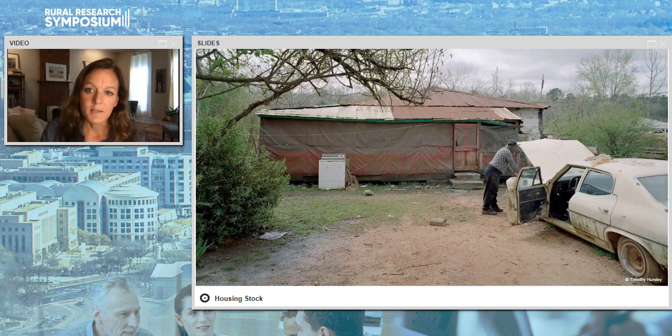But I'd like to focus back to housing and talk about where we are now. This was a common scene 20 years ago when we first started at the Rural Studio. But the housing stock has changed, and the trailer house is really what we see more of today. The reason for that is this new reality: it's easily attainable, kind of like getting a car note. Most of you probably know it has really only a 15-year lifespan, though. They're really hard to repair, and they're not really affordable at the end. But a lot of our clients own their own property already, so it's easy to buy a house and place it there. So we do understand, but we are seeking a better solution.

Around 14 years ago, we started the 20K house project, and we've developed a series of prototypes to address housing affordability. Over the years, we've built over 26 of them. Here's my chance to remind you again that this is all student work. Between about 4 students build each one of these projects.

The students in their 5th year of study work on big topics like aging in place or issues of accessibility. But we always address some very central criteria in our houses, which all buildings should have: they should be durable and buildable, waterproof, and secure.

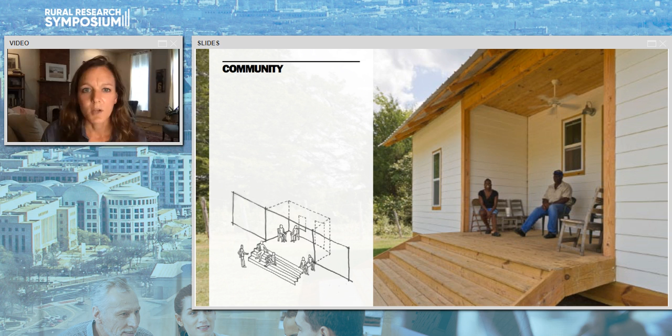Over the 14 years, we've developed a series of other criteria that are important to us, essentially high performance criteria in one way. Presence is important to us, so being proud and having a house that is dignified, a house that fosters a sense of community, which is often accomplished with a porch.

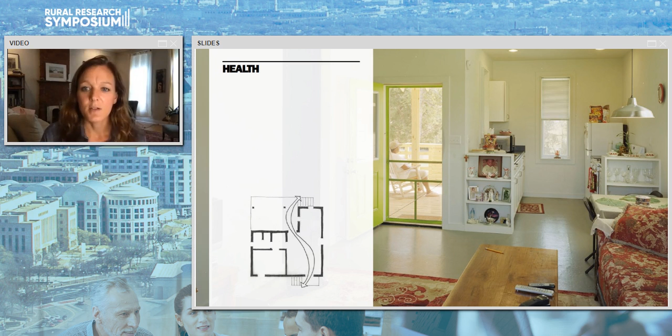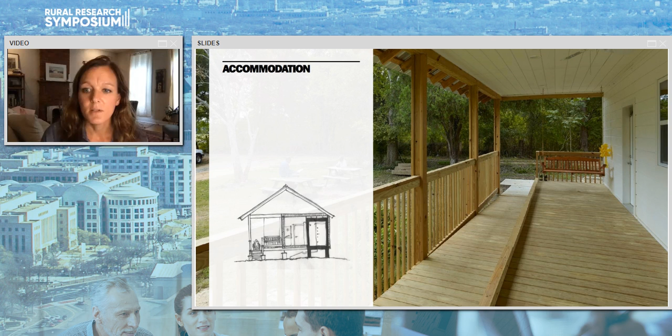Of course, the health of our occupants is really important, so our houses look at access to daylight, fresh air, and healthy materials. And of course, accommodation, making sure that we have housing types everyone can use, even if you have mobility impairments. The houses should also convey a sense of craft, because even something affordable should be well put together.

But I think the most important part of our program, and I keep reiterating it, is that architecture students build this. We are a hands-on program, so they are gaining knowledge about how to put buildings together, and our community is benefiting from their energy and their dedication.

I mentioned that the older students look at broad issues, and I want to take a minute to walk you through what the younger students study, which are my group, the 3rd-year architecture students. We take one of three prototypes each year and study it very intently. If the 5th-year students are studying broad issues, we're studying really deep and detailed issues.

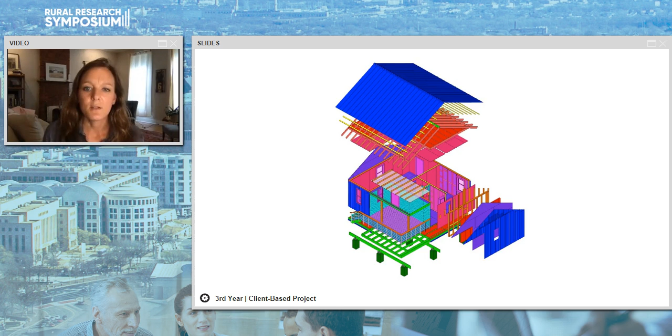My students look a lot like this. They're about 20 to 21 years old, don't have very much construction experience, and have actually never had any experience working with a real client and finding a suitable house for that individual.

This year's client is a lady named Ophelia Reed. She was born in our hometown of Newbern and has lived there for over 50 years. She has a very strong family network, and she also has an existing house and owns a piece of property. So when we were selecting which house was most appropriate for Ophelia, we took all of those things into consideration.

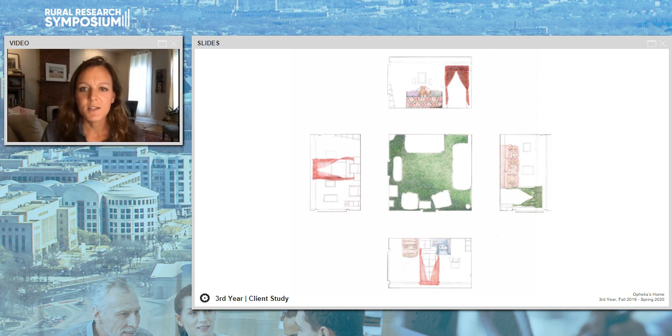One of the unique things about Ophelia, and the way we learn from her, is that I have my students do really detailed and beautiful drawings of her way of life. It's kind of like an interview, but through observation. One observation my students made was that she really loves her daybed, where she likes to sleep in the living room, where the TV is and where all the family activity is.

So special things like that for our client, we really take into account. This is a furniture layout. A lot of the houses we build are about 500 square feet, but Ophelia is moving from a house that's almost 1,200 square feet, so we catalog all of her belongings and ask her what she'll be taking over to the new house.

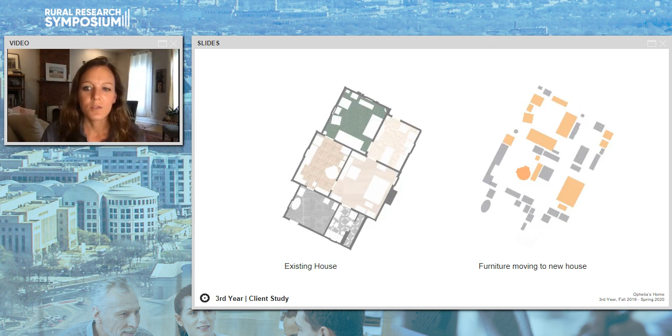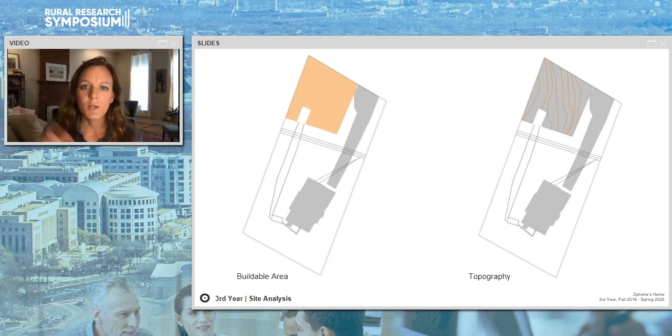...how flexible are the prototypes to fit onto an existing piece of property, which is really one of the missions of the 20K house. You can see here that Ophelia owns about a third of an acre, and we can only build on a third of that third of an acre.

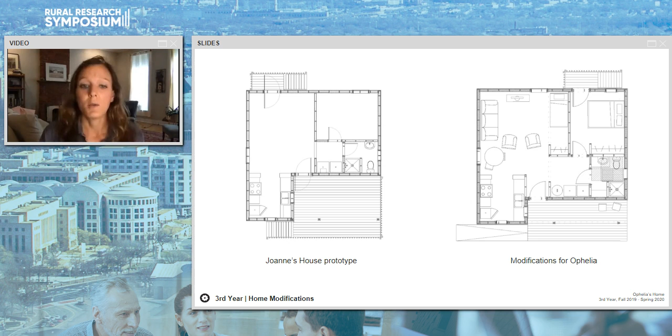So Ophelia's house is essentially a cousin of the prototype. You can see on the right the modified house plan. We enlarged the floor plan just a little bit and built a little sleeping nook into the living room, so Ophelia can put her daybed into the house, but another client might put a home office there, or it might be used for additional storage. These little tweaks are the way we adjust our houses to the real people who will occupy them, which is really the most important part.

So you can see Ophelia's house is actually the third iteration of the original one, which was what we call Joanne's.

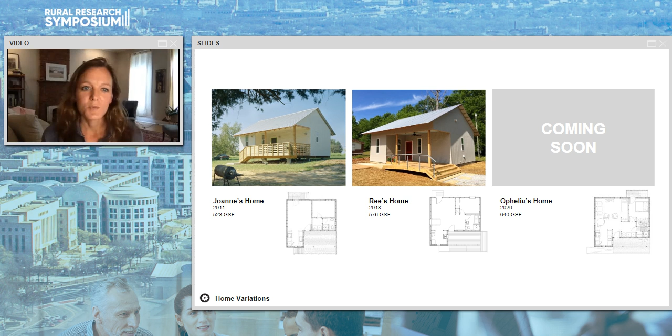I'm very proud, as my colleagues are, who work for the Rural Studio and the Front Porch Initiative, because we really think we are helping to train the next generation of architects and designers to be thoughtful contributors to the built environment.

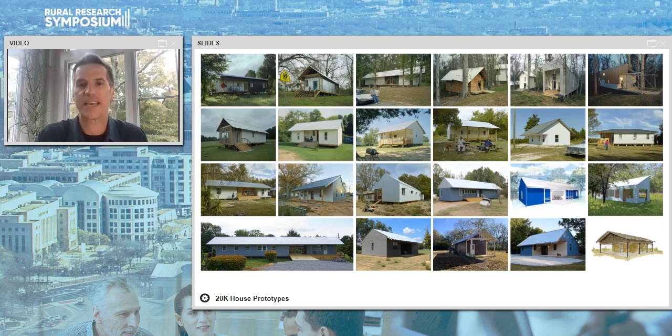As Emily discussed, over the past three decades Rural Studio has been engaged in the design and construction of numerous affordable housing prototypes in our five-county service area in the rural Black Belt of West Alabama. The Front Porch Initiative seeks to extend the impact of this applied research, offering housing products and technical assistance to external housing providers currently working to deliver homes in their own under-resourced rural communities.

In our own service area, Rural Studio works in a charity model, designing, building, and ultimately gifting houses to homeowners that under no circumstances could provide a home for themselves. The Front Porch Initiative simply takes the knowledge we have developed through these decades of work and shares it with housing providers outside our traditional service area so they can in turn provide the same energy efficient, resilient, and healthy homes to their clients of need through their own procurement models.

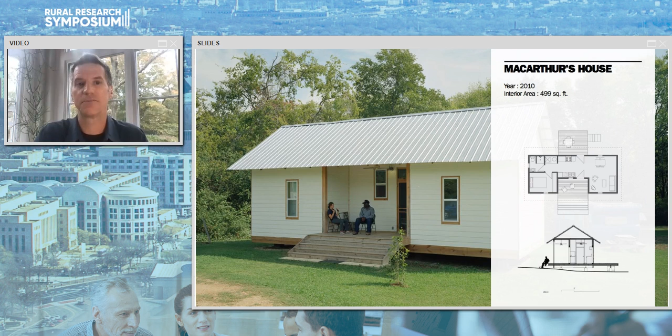We currently have four product lines of houses, each named after the first clients to own each of the prototypical homes. Each of the one and two bedroom houses are small, but not tiny. They are designed to be as efficient as they can be, meet all conventional code and lending requirements, be titled as real property, and be lived in normally. Here we have Dave's house, MacArthur's house, Joanne's house, and Buster's house.

In the Front Porch Initiative Technical Assistance Program, we share our knowledge on what to build relative to codes, universal design standards, lending and insurance requirements, and the like. We also share our know-how, where we show what to build through a comprehensive set of construction documents and specifications for each of the houses.

Through these partnerships we have learned a number of things. First, it's not only important to show what to build, we now know we have to show how to build it, and even more importantly, why it's built that way.

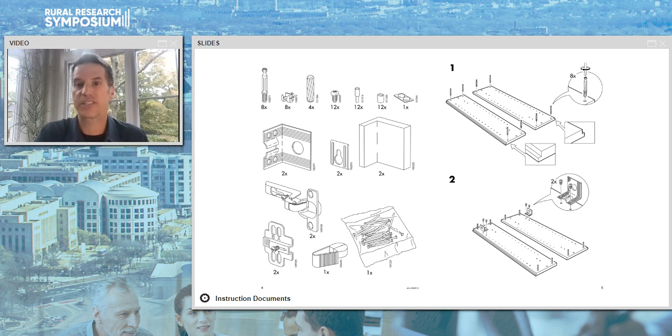We are all familiar with the IKEA model, where we're provided a catalog of materials, a funny little tool, and a really clear and comprehensive set of step-by-step instructions through which we can all become competent furniture builders. With our builder partners, we provide the same kind of instructional documents for the house.

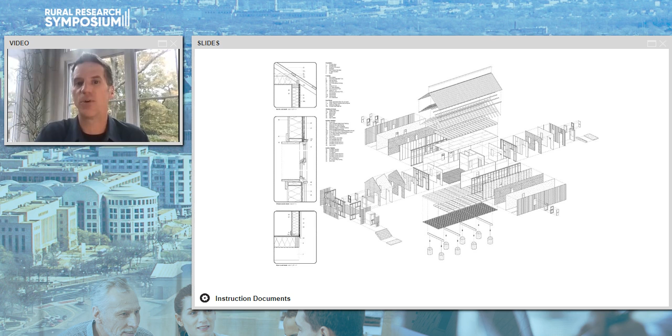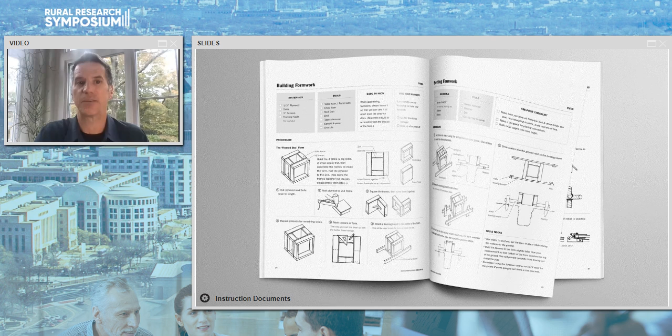We know every single detail about how the house is assembled, and every single thing about the construction sequence. From this we are able to provide a set of instruction documents that walk them step by step through both the hows and the whys of the construction of each home.

This notion of why we build this way versus that way is key in addressing the fundamental challenges of affordability. While it's certainly important to ask what does a house cost to build, it is perhaps more useful to consider what a house actually affords. In other words, what impact might we have on affordability if we could begin to consider the total cost of homeownership in the overall financial equation?

More directly, we have found that our homeowners are not primarily challenged because they can't afford their mortgage, which in rural places is often simply a direct reflection of the upfront costs of construction. Instead, they are more often challenged to stay in their homes because of four other circumstances.

First, they may have an unexpected energy bill. In our part of the world, our homeowners may have an energy bill of $35 to $45 a month in March and April, and an energy bill of $350 to $400 in July and August.

The second thing that happens, they may have an unexpected maintenance or repair bill. We live in an area of highly volatile climatic activity, right in the middle of Tornado Alley and right in the catcher's mitt of the Gulf Coast, where every Gulf hurricane pauses directly overhead as it becomes a tropical storm.

Maintenance and repair due to storm-related events plays a significant role in the financial security of our homeowners. Third, our homeowners might have an unexpected healthcare event in their lives. And the fourth area of influence on our homeowners' financial well-being is that our homeowners rely predominantly on part-time work, shift work, and seasonal work to make ends meet, and additionally live in complex kinship networks in which everything is shared, from housing, transportation and income, to food, elder care, and child care. Any disruption in these community networks can be disastrous for generations of a family.

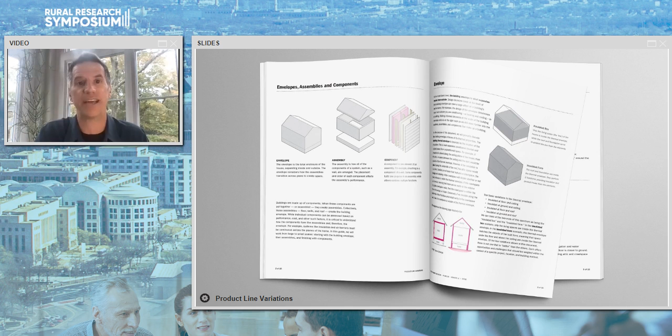Lastly, working with our builder partners and homeowners, the Front Porch Initiative provides the information, knowledge, and know-how around each of these instrumental areas to help them make informed decisions with regard to the quantitative and qualitative aspects of building performance, all of which allow a clear decision tree that considers both the cost and value of action, as well as the hidden cost of inaction.

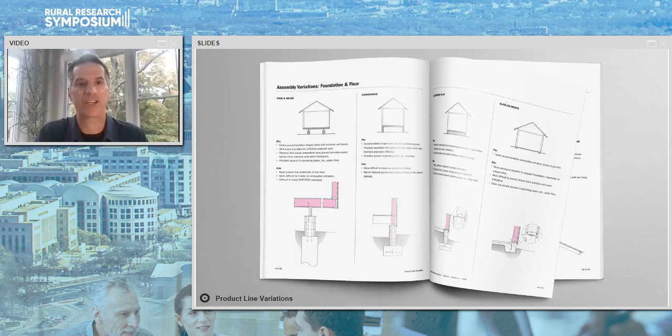Taken together, this iterative process of evaluating both the cost and value of building performance criteria around a particular housing provider's unique needs and desired outcomes lends itself to a highly customizable process that yields a wide variety of housing options and variations. Now, to help understand more about building performance matters, or how it matters, Betsy will take a little deeper dive into a case study of energy efficiency. Betsy?

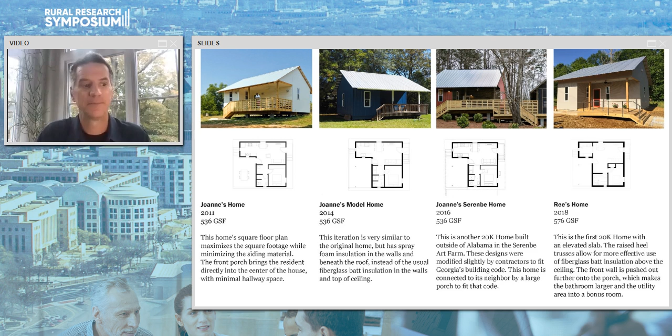Thanks, Rusty. So I'll share a case study of 2 iterations of one of our product line homes and how we incorporated multiple building standards.

Auburn Opelika Habitat for Humanity is our local Habitat affiliate. We have a long history with them, and they were one of our first external partners outside Hale County, Alabama. These 2 houses were a partnership with architecture and building science students as volunteer labor, with a professional contractor acting as the project manager coordinating subs.

It increases property value because they can now be improved, and it expanded the affiliate's client base beyond families who need that larger 3 to 4 bedroom house. Now they serve smaller families.

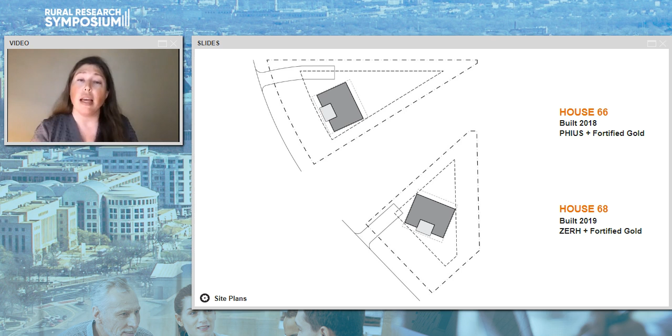The site plan shows how the houses fit on the sites within their setbacks. House 66 at the top of the screen was built in 2018, House 68 in 2019, and they are the same house, a 2-bed, 1-bath prototype. Both were built to fortified gold, high wind and hail, a structural resilience standard, but to 2 different energy standards. The first house was built to passive house, at the top of this diagram. The second house was built to the less rigorous Zero Energy Ready Home standard.

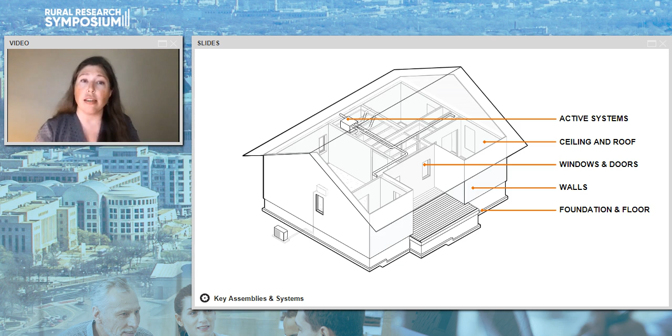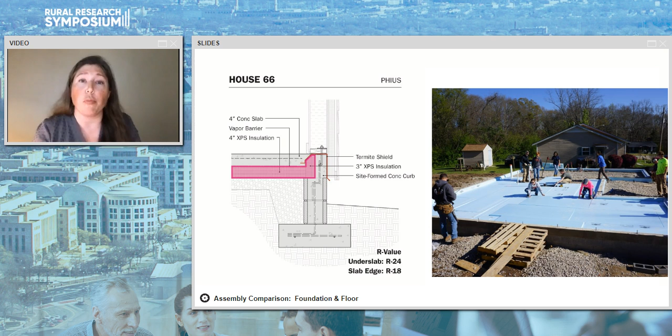We'll start by comparing the foundation and floor detail, beginning with insulation shown in pink. You'll notice that the House 66 detail, built to passive house, shows substantial underslab insulation with an upturn at the edge of slab dictated by our energy model in design. In the photo at right, you can see that the underslab insulation is continuous across the footprint.

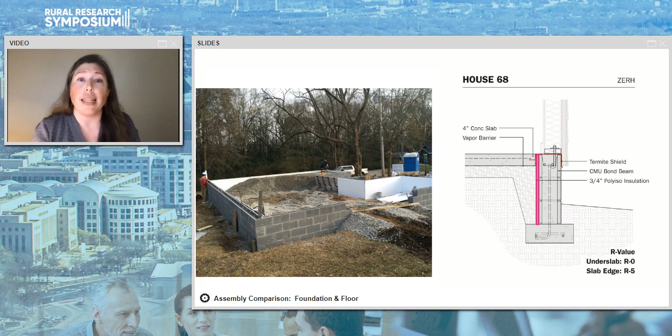This represents substantial cost. By comparison, House 68 includes only an edge of slab thermal break. Energy code in climate zone 3 requires neither under slab nor edge of slab insulation. However, from our experience of building to the PHIUS standard, we understood the importance of a thermal break in minimizing heat loss through the stem wall. So for the second home, we simply provided vertical board insulation at the inside face of wall. Because we were applying a structural standard as well, we needed to provide rebar and anchor bolts to satisfy continuous load path requirements of Fortified.

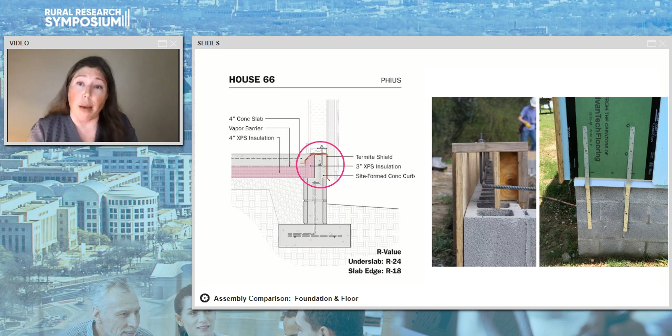To apply them to the face of exterior wall, we had to cut into our termite shield for the straps to lay flat. The time and labor to execute this curb detail motivated us to reconsider the top of wall detail for the second home, hence the simpler detail at right.

Our 8-inch CMU bond beam accommodates rebar and bolts comfortably. We incorporated lessons learned from the first house and cast straps into the corners into the top course of the stem wall, maintaining proper air sealing. This allowed for a clean installation of our stud walls.

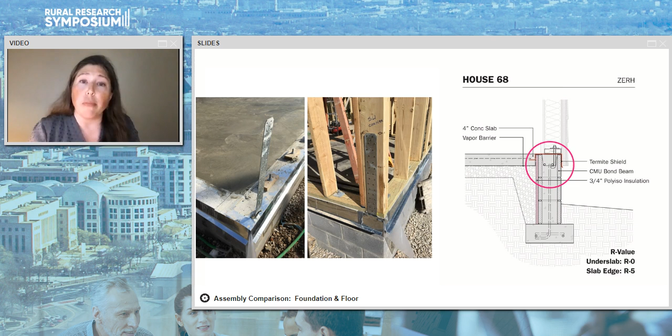Both houses include a termite shield since we're located in a very heavy infestation zone. We're currently studying how this bent piece of metal affects energy loss by acting as a thermal bridge, and we log regular temperature readings at the base of each wall.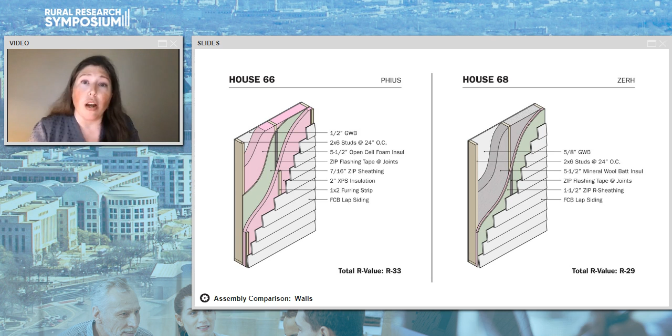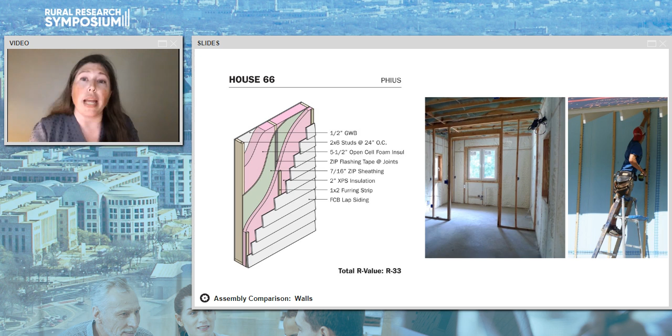Both homes utilized 2x6 construction. Our energy model determined the R value required for each wall section. At House 66, our stud cavity is filled with spray foam insulation, with 2 inches of continuous insulation run outboard of our sheathing. We included furring strips for the attachment of siding, but we realized that the number of layers to build up the wall is time-consuming.

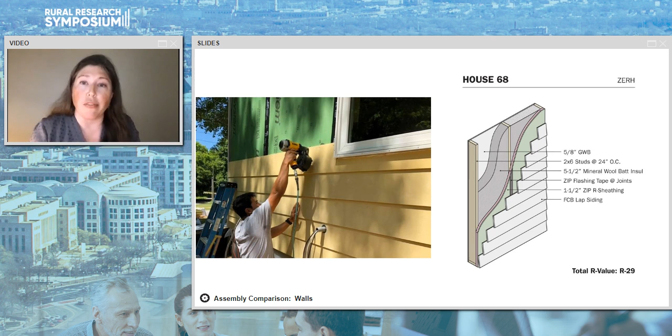Our slightly lower R value for House 68 results in a more straightforward wall section. We utilized Zip R sheathing with integral continuous insulation for our thermal break, and we did not elect to include furring. This wall section necessitated fewer steps. Zip R comes at a material cost premium, theoretically offset by a reduced cost of labor, but that savings was not realized on this Habitat for Humanity project. It did simplify installation, however.

PHIUS certification requires use of listed products. The windows were definitely more expensive than the Zero Energy Ready home based on the performance. We have a triple glazed and gasketed vinyl window at left and a double glazed window at House 68.

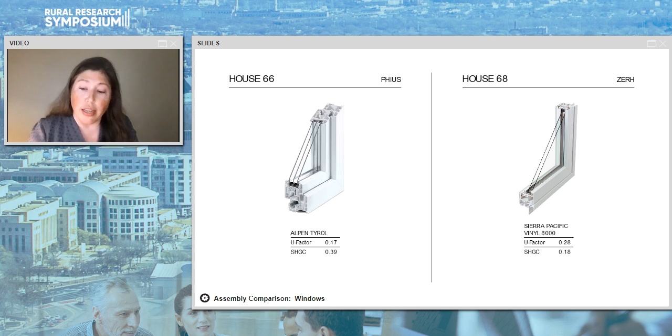And we learned that building to PHIUS added complexity and cost to the window selection. It's hard to find a PHIUS listed window locally. And designing to a high standard also requires additional forethought.

We wanted to keep the face of glass in line with the drainage plane, so students built plywood box outs and paid careful attention to detail in flashing to ensure that the air sealing was uninterrupted.

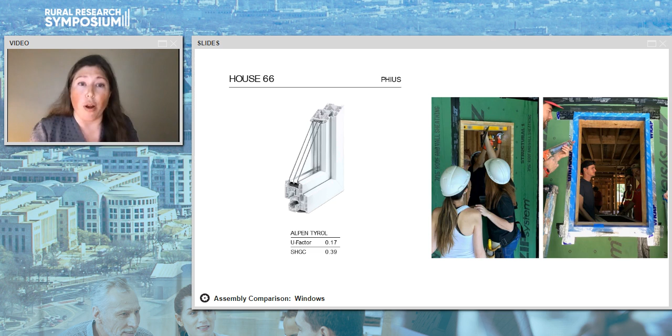For House 68, we had a much more straightforward detail. There's slightly less performance built into the window, but the installation is much simpler.

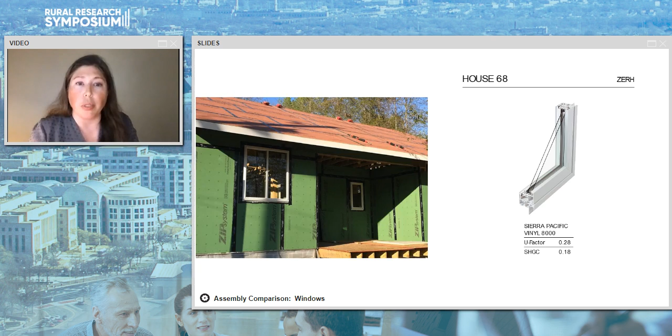The most significant difference between the two houses is in the construction of the wall-to-ceiling and roof interface. Due to stringent air sealing requirements of Passive House, students framed the walls and ceiling, then sheathed and air sealed the attic floor assembly, tying into the seal at the walls for continuity, shown by the red dashed line. They then conducted a blower door test to find and eliminate leaks.

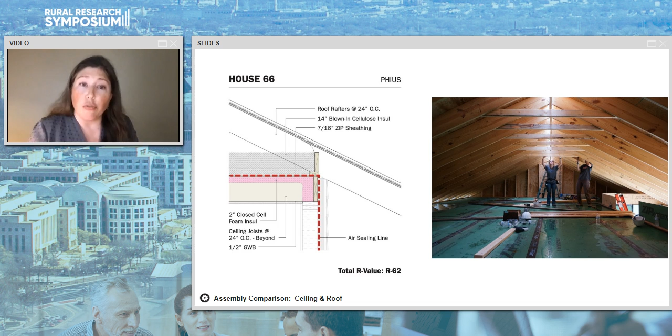Then a roof was stick framed on top of that sealed box. Again, lessons learned on the first house informed design of the second house. With a solid understanding of how to ensure a continuous air seal, students reconsidered their approach to framing.

At House 68, they utilized conventional prefab truss construction with an energy heel, with the inside face of the gypboard ceiling as the plane of the air seal, again the red dashed line. Use of conventional wall framing with prefabricated trusses provided a significant improvement to the overall schedule, and it's the typical method for drying in a house.

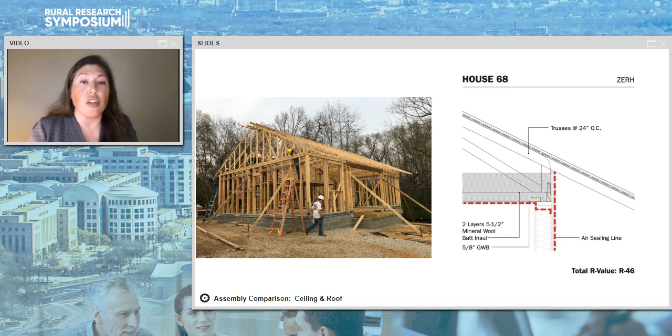There was one slight effect on the construction sequence. Our gypsum board subcontractor installed the ceiling, then had to take a break while the blower door test was conducted, and then was able to return to install the wallboard. This minor disruption was much less than the framing sequence of House 66.

Focusing on the Fortified standard again, at House 66, the roof was added on top of a sealed box, so students tied down the roof structure with wall straps, connecting the gable end walls to sheathing of the walls below.

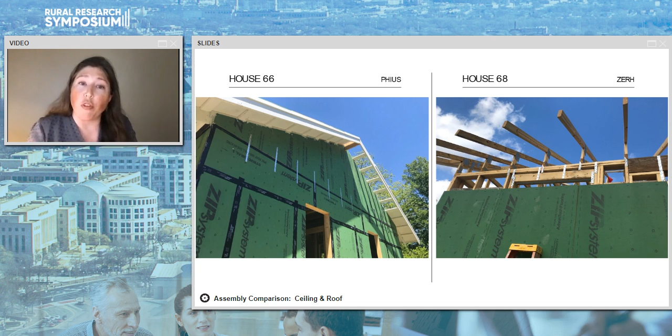By comparison, at House 68, the structure was tied together before the sheathing. The photo at right shows straps for Fortified applied to the framing. This allowed strapping to be completed all at once.

Our process involved extensive energy modeling during design to optimize assemblies and details and to ensure that each design met its energy standard. And now we're conducting post-occupancy monitoring remotely to track actual performance.

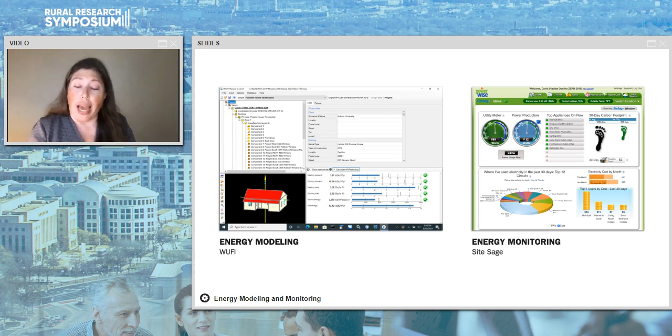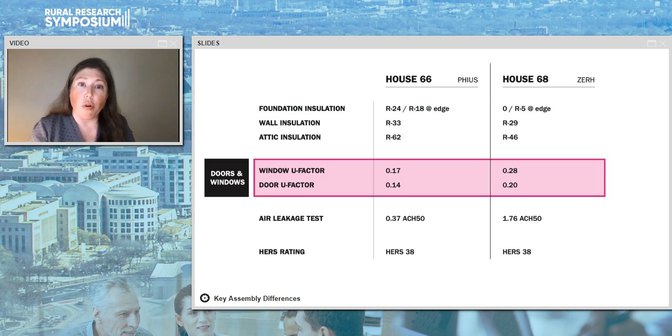To summarize our differences in assemblies, we have significantly more insulation at the passive house. Our windows and doors perform differently, which directly translates to a difference in cost. We have more air leakage at house 68, but we still exceed code by far.

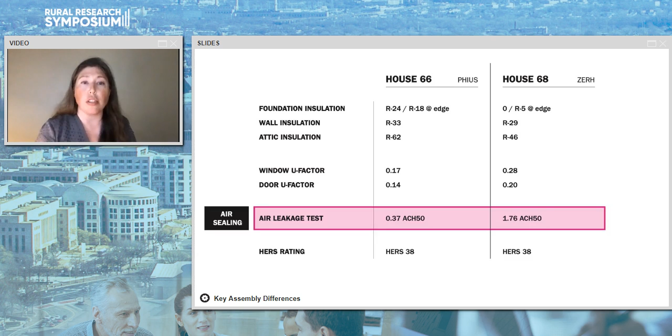We wanted to see how different approaches to detailing of the air barrier at the ceiling plane of house 68 compares to house 66, especially relative to construction costs. And despite all the differences in construction, both houses had the same design HERS score predicted.

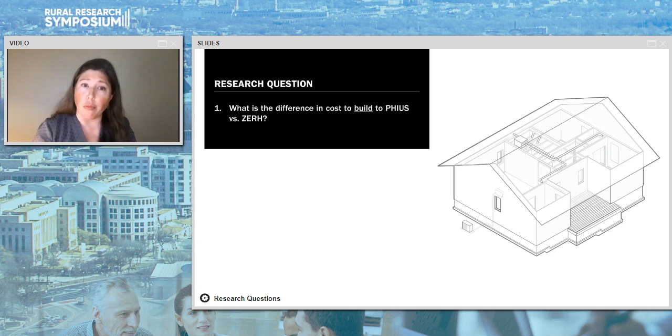Our first research question for these two iterations focuses on the cost of construction, specifically the cost of elements related to building performance. Controlling for the building systems highlighted previously, so no interior finishes, millwork, site work. Keep in mind these are habitat homes, utilizing volunteer labor with a few select subs, like concrete slab, gypboard, plumbing, and electrical.

We found approximately a 20% delta in construction cost. It cost about $10,600 more to build to PHIUS. And the most significant difference is at the foundation, which has a 50% delta.

Now that we've established relevant construction costs, our second question focuses on operating costs. We're monitoring power consumption at the circuit level using equipment plugged into the breaker box, and we've grouped energy use into 3 categories. The first category is tied directly to the construction of the house and includes heating, cooling, ventilation, and dehumidification. We're monitoring interior temperature and humidity for both houses to ensure similar set points.

The other 2 categories are highly variable because they're occupant dependent. You can see how they add up, but for the purposes of this research, we'll be tracking category 1 only.

Over the last 8 months, we've been monitoring energy use while still commissioning equipment for house 68. In the process, we noticed an excessive power draw for the dehumidifier circuit. Turns out a faulty humidistat had it running continuously for the months of July and August. With that repair, our numbers have returned to a more normal spread.

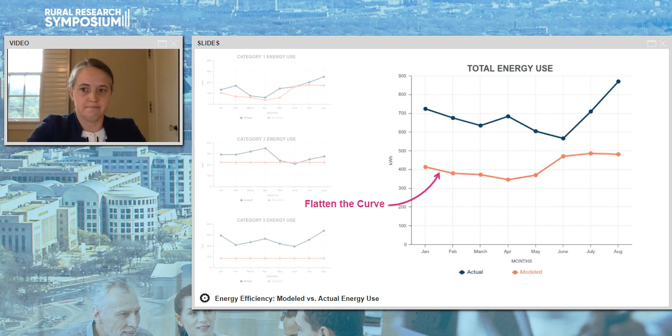As an aside, there have been multiple studies that show energy-efficient homes have a lower mortgage default rate. We believe this is due, at least in part, to the greater predictability of energy bills. In our climate, we have pretty good shoulder seasons, however we also have a lot of humidity, which makes the hot feel hotter and the cold feel colder. Unexpectedly high energy bills in the heights of summer and winter can lead our clients to choosing between paying their energy bills or making mortgage payments.

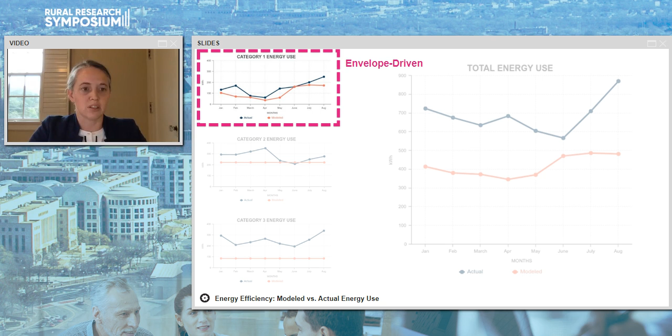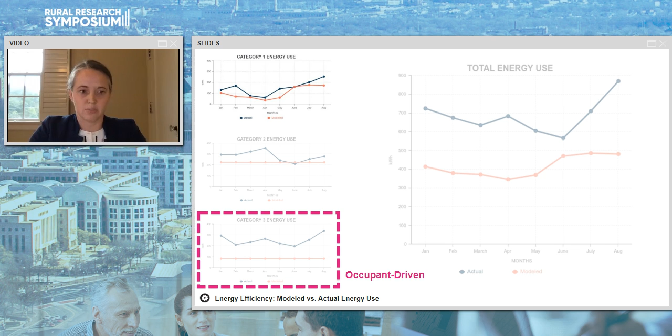Now back to our graphs. Category 1, which includes heating and cooling, ventilation, and dehumidification, is largely envelope driven, and you can see the actual use is relatively close to modeled use. Conversely, the actual use of Category 3, which consists of plug loads and is predominantly occupant driven, is significantly higher than projected use. There isn't much that the design of the envelope can do to affect this energy use.

To sum up, the owner benefits not only by having a more thermally comfortable home, but also through lower and more consistent monthly bills. The lender also benefits by having a more financially stable homeowner that is better prepared to make timely monthly mortgage payments.

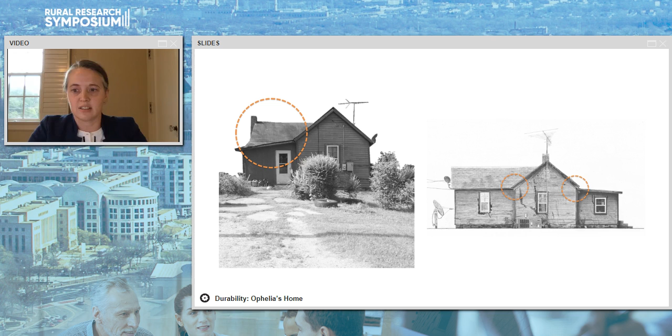Next, we'll dive into durability and resilience, which we think of as two separate and distinct concepts. Durability is about holding up to normal wear and tear on a building. One thing we frequently see in our service area is that homes have been modified and added onto over time to accommodate changing family need, which makes sense in our rural areas with limited housing stock. However, the connection between the original house and the additions tends to be the weak point of the home and adversely affects the home's durability. To increase durability, we're looking at alternate construction techniques such as post-frame construction, where a large roof protects a structure underneath.

Conversely, resilience is the ability to mitigate and recover quickly from shocks and stresses. For us, that generally comes down to taking steps to minimize displacement. But first, we have to understand what we're trying to protect, the occupants or the asset. Sometimes these things are in conflict, so you have to assess them on a case-by-case basis.

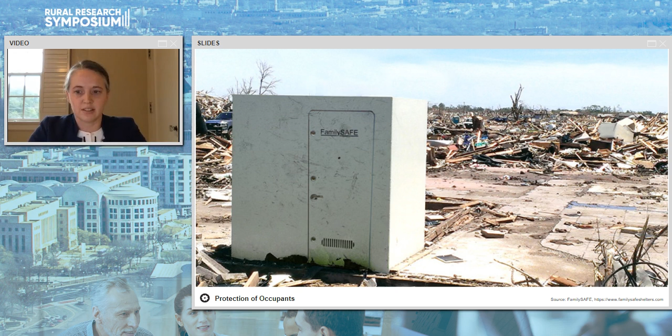When we're talking about the protection of occupants, we're talking about sheltering in place during a storm event. In our area, that most frequently involves tornadoes. In these cases, you're detaching the shelter from the rest of the house, and in the worst cases, it is the only thing left standing after a storm event. Generally, evacuation centers and community shelters can provide a safe and less costly option for shelter during a storm event.

However, in this particular example, we are linking sheltering in place with aging in place. This home was designed to accommodate someone with limited mobility. The home is in a rural environment, and the combination of limited mobility and physical distance would make it difficult for the homeowner to reach a community shelter. When we looked for space to place an above-ground safe room inside the house, we looked for a small, windowless space that would not have a tendency to be filled with stuff, a tall task in a small house.

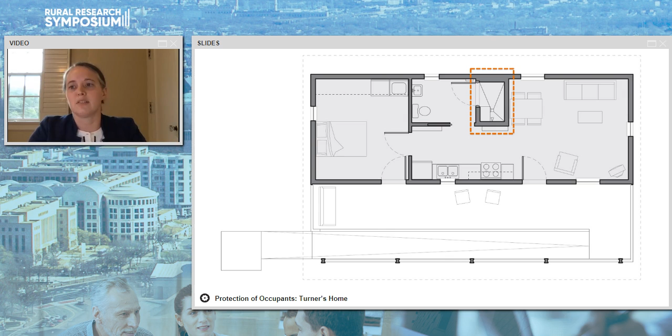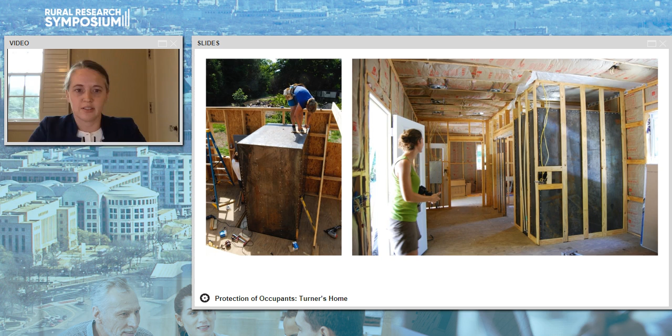So we decided that the best place to locate the safe room would be the shower. To date, it is the only roll-in safe room shower we know of. It is structurally separate from the rest of the house and sits on a dedicated foundation, but is unnoticeable once the home is complete, with the exception of the safe room door. The homeowner has hung up a small shower rod and shower curtain for everyday use.

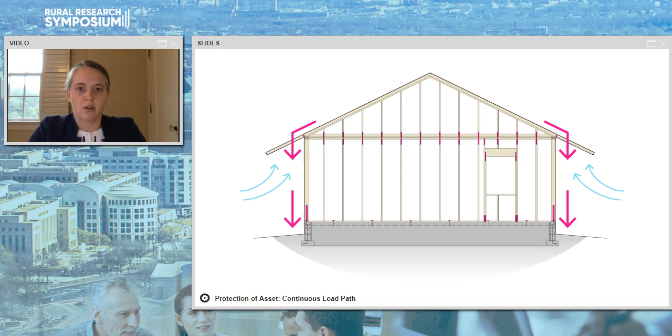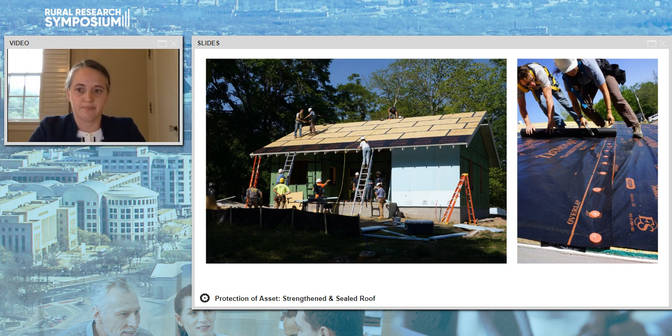In contrast, when we're talking about protection of the asset, we look to insurance programs like IBHS's Fortified Homes guidance. This program is not about sheltering in place, but instead is about minimizing damage from high winds and therefore minimizing displacement. The key word here is continuous load path. The roof is tied to the walls, and the walls are tied to the foundation, all with the goal of resisting uplift. This is accomplished through a series of Simpson connectors, which we have found do not add too much material or labor cost to the house. Special attention is also paid to the strengthening and sealing of the roof deck.

When we incorporate resilience features into a home, we mitigate risk to all parties involved, and perhaps most importantly, we minimize displacement of the resident should a storm event occur.

I'm not going to go as deep into aspects of health and wellness, but in some ways it ties to the other topics we've already discussed. We usually think about the health benefits of housing as a collateral effect, but we can be intentional about the positive outcomes we're creating. For example, proper air sealing and ventilation of a home, which increases energy efficiency, also helps improve air quality and eliminate dust and pests.

Healthier homes help reduce instances of environment-induced illness, which in turn has the potential to reduce both health insurance claims and missed work and school days due to illness.

Our last performance metric today is perhaps the least tangible. It may be most easily conveyed through anecdote rather than data. With an aging housing stock, many of our rural clients are living in homes that have become largely substandard and beyond repair. Therefore, we focus on replacement housing, which we see as a third space between repair and new construction. The replacement model allows us to leverage existing infrastructure, such as the electrical meter, water meter, septic system, and driveway.

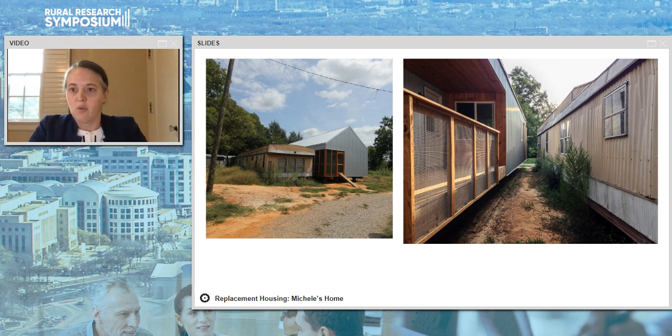Similar to the other examples we've shown, strengthening community networks provides stability for homeowners and their neighbors, and stability is key to staying on track with affording the home. To sum up, we're looking at performance in a broader context. We believe that high-performance homes are more comfortable, safer, healthier, and provide more stability, all of which translates to more economic security. Thank you, and we look forward to talking to you.